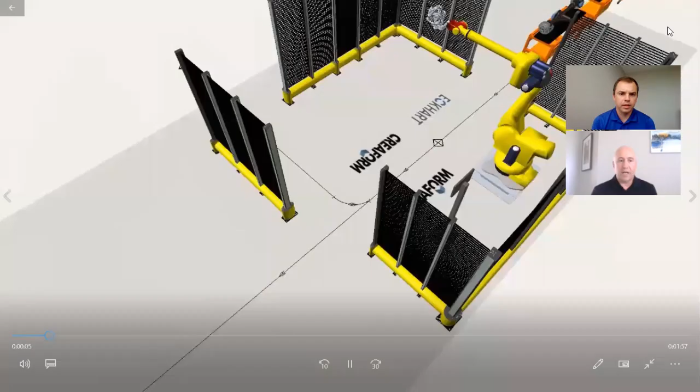So this is something we've been working on here. This has kind of been a vision of mine for quite a while. I think it really lends itself to this wave of flexible manufacturing.

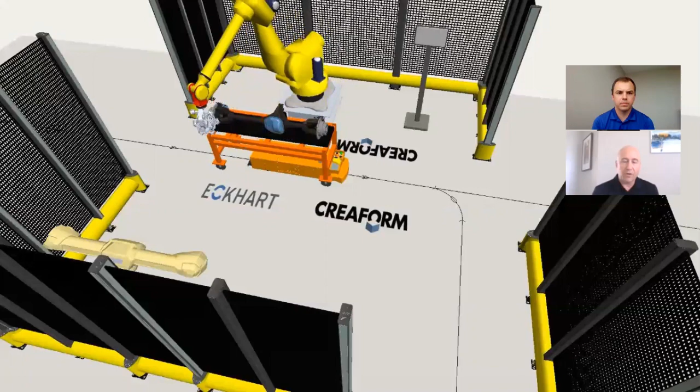Basically on Eckhart's AGV here, on that companion rack, it brings the part in to a fixed location. Again, with our dynamic tracking—you can see the C-Track closest to us here—it tracks the environment, tracking positional targets that are placed on that rack.

As the part comes in, it gets scanned, communicates with the robot that it's a good part, and it goes off on its way. The next part comes in and sends a signal to the robot to call up the certain robot program.

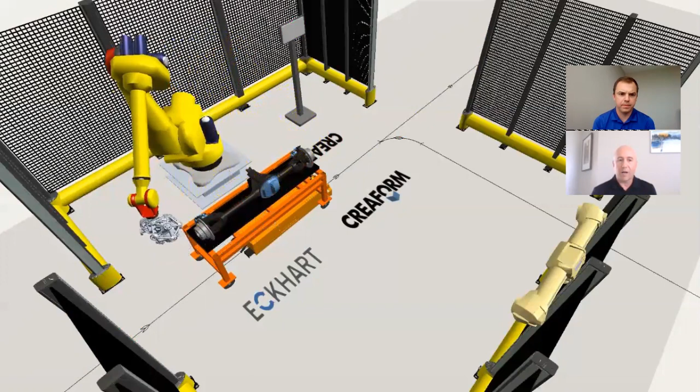The inspection program is all automated within this functionality as well. The robot goes about scanning the surface and all of the different features that we call out in the robot program and the inspection report.

And then we get a pass or fail. For the robot, it's a pass or fail, and the AGV would take it off to a rework station if it failed certain parameters.

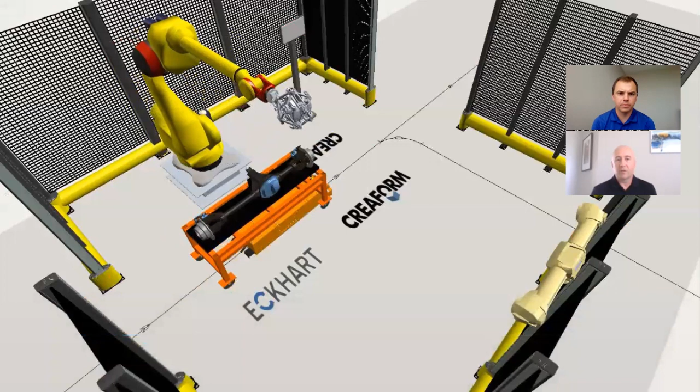This highly flexible, highly mobile movement of your parts really lends itself to being something you can do close to the manufacturing process. And one of the problems this solves is the bottleneck that other CMMs or inspection systems have, having to be isolated in a quality lab.

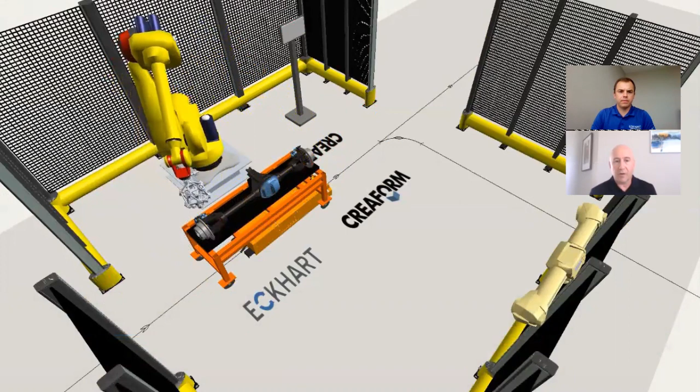Ours can be out there on the plant floor, and having this movable cart come in and out of the inspection cell is really powerful. So this is something we've been putting together and we're really excited to work with you guys on.

Yeah, and so obviously you guys have the end-of-arm tooling here. Do you want to touch on the other pieces of hardware that you guys have featured in here?

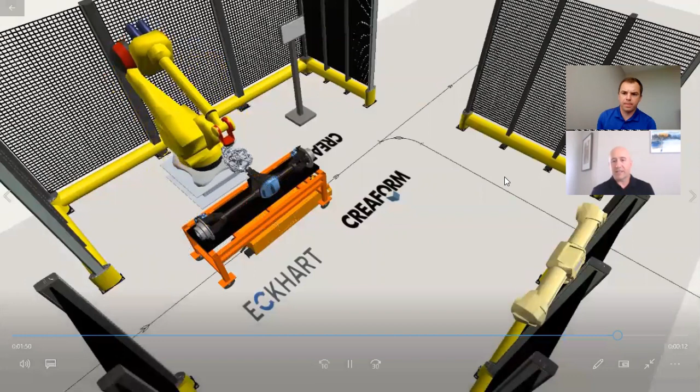Yeah, so on the right-hand side, up to the right, there's the C-Track. That's our dynamic tracking device, and it's tracking the end-of-arm tooling there.

As this moves around, we've eliminated all of the positional accuracy dependence—or we're not getting any positional accuracy from the robot or necessarily the AGV itself. Those typically aren't accurate enough for the accuracy specs that we go for.

So with our dynamic tracking setup, we're tracking the head and we're tracking the cart independent of the location of where the robot thinks it is.

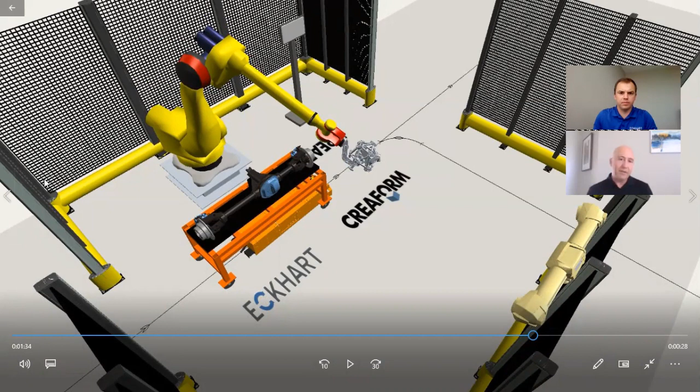This same technology can be used for any kind of end-of-arm tooling tracking, maybe developing that out for more precision drilling and tapping, or robot calibrations, and those kinds of things as well.

Got it. Appreciate the overview there, very helpful. Jump back in here—stop share.

Can you talk about the product development pipeline for Creaform and anything you guys might be working on?

Yeah, our R&D facility is up in Lévis, Quebec. They're very tight-lipped on new products and development. The competition is extreme right now, so letting things slip out too early is kind of detrimental.

But we do have a product launch planned near the end of June, and as always, our R&D team is pushing the edges, always trying to make things faster, higher resolution, more accurate, with better data acquisition, and better able to scan shiny surfaces.

Portability is one of our mantras at Creaform, so I'm sure whatever they have planned is going to push that next level of metrology forward. Stay tuned—we'll have a lot more coming out probably the end of June.

Good stuff. How about a unique part or application that you can maybe share with the audience here?

So we've already touched on AGVs, super excited about that. But other applications—in my role it's fun because I get to talk to robotic startup companies, integrators, and end customers trying to develop new techniques. The applications I get asked about most, one I touched on, is end of arm tooling tracking. The robot goes to a location based on the coordinates you gave it, but we can precisely tell the robot exactly where it's at.